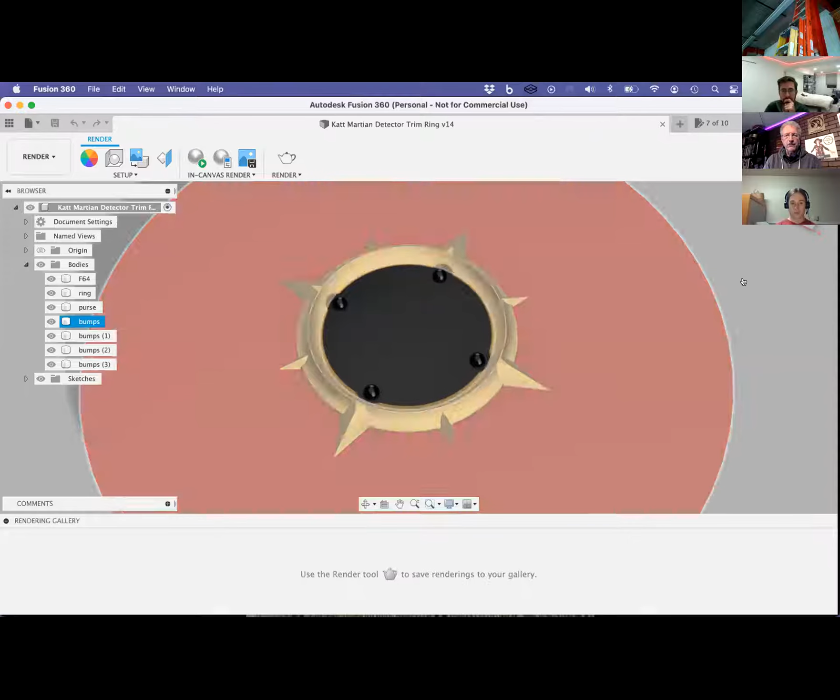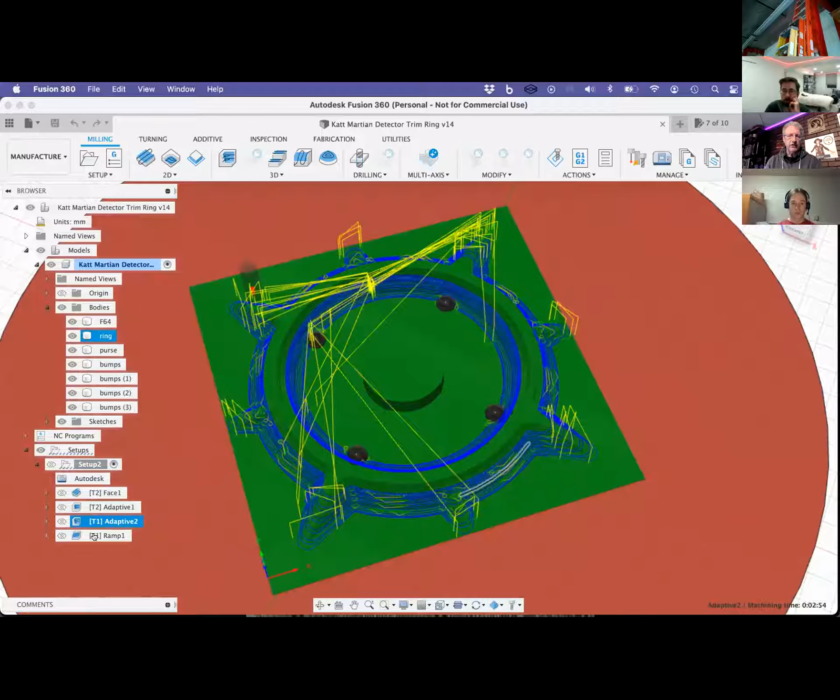Oh, and then some little cutouts here for those bolts. And then it was milled out of brass using 4 tool paths. The first one was a facing tool path to bring the material down to the highest point, then a 1/4 inch end mill to do some roughing, then an 1/8 inch end mill to get a little bit closer, and finally a 1/16 inch round end mill to do the surfacing.

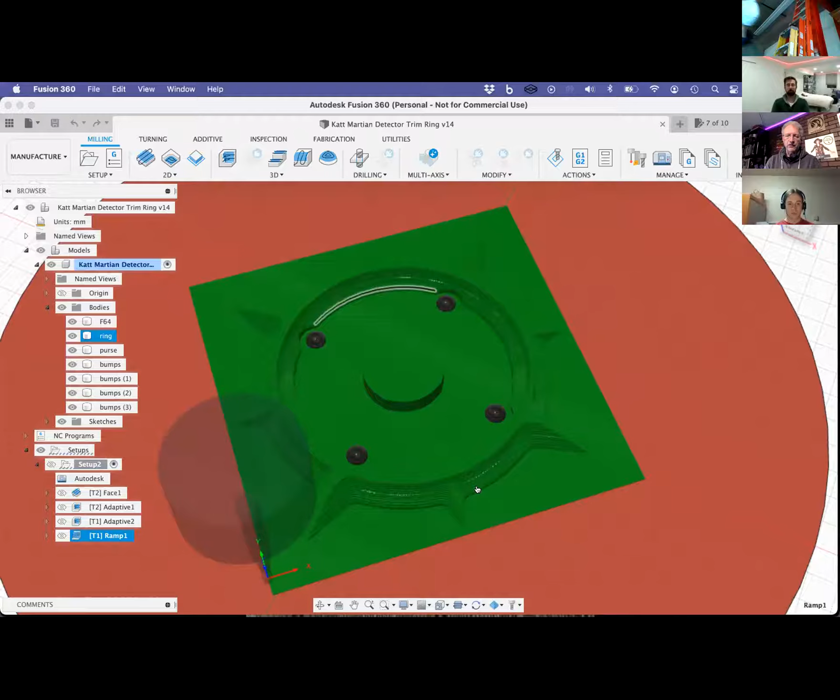It came out fairly good. I only had 1 piece of brass, so I only had 1 chance. But if I had it to do again, I think I would make these steps a little bit smaller, because there was still a tiny bit of stair stepping in the piece itself. And then there were some burrs that came off using a wire wheel on a grinder.

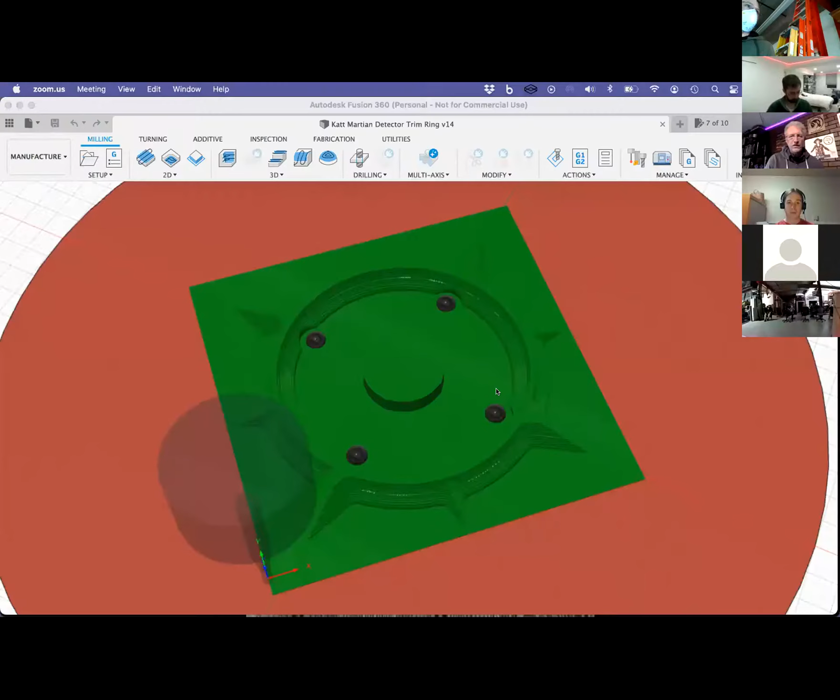So the thing I chatted, which you probably missed - if you zoom in on that toolpath you've got up now on your screen share, can you show people what that actually is? I think it looks like all it is a rendering, but it's actually not. That's tens of thousands of lines of toolpath.

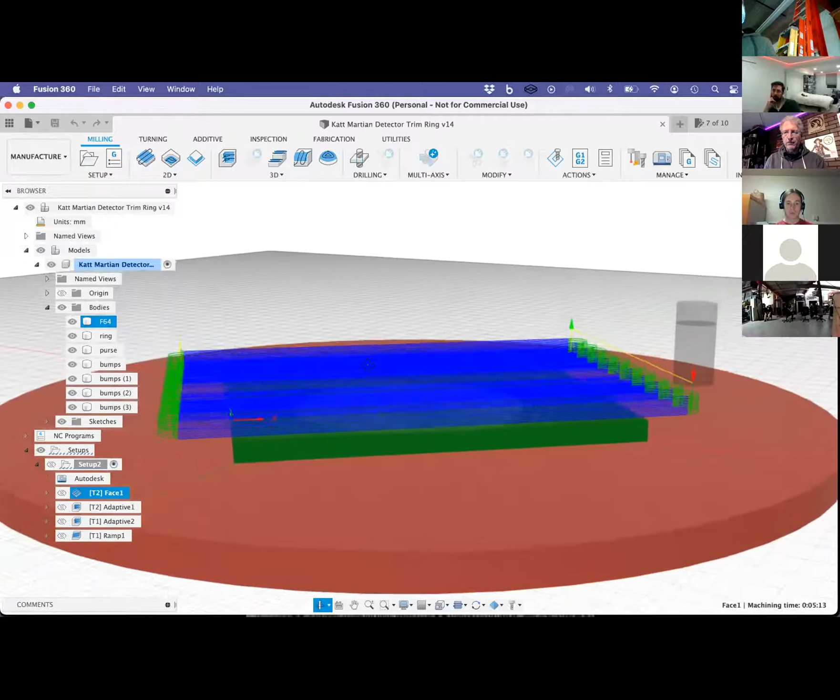Right there, so if I select the facing one, the blue lines are all cutting passes. Because this is kind of a desktop mill, I have to take small bites, so I think these are 0.3 millimeter step downs. If this was a giant Tormach, you would just go right through this and take a quarter inch or eighth of an inch of brass all at once. But on this thing, it goes back and forth, and that takes my quarter inch stock down to, looks like about an eighth of an inch.

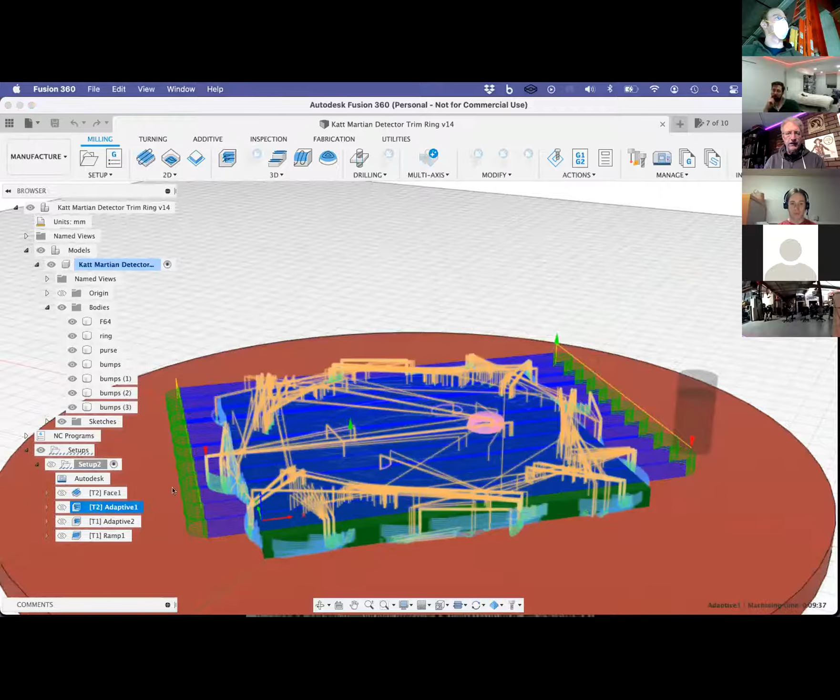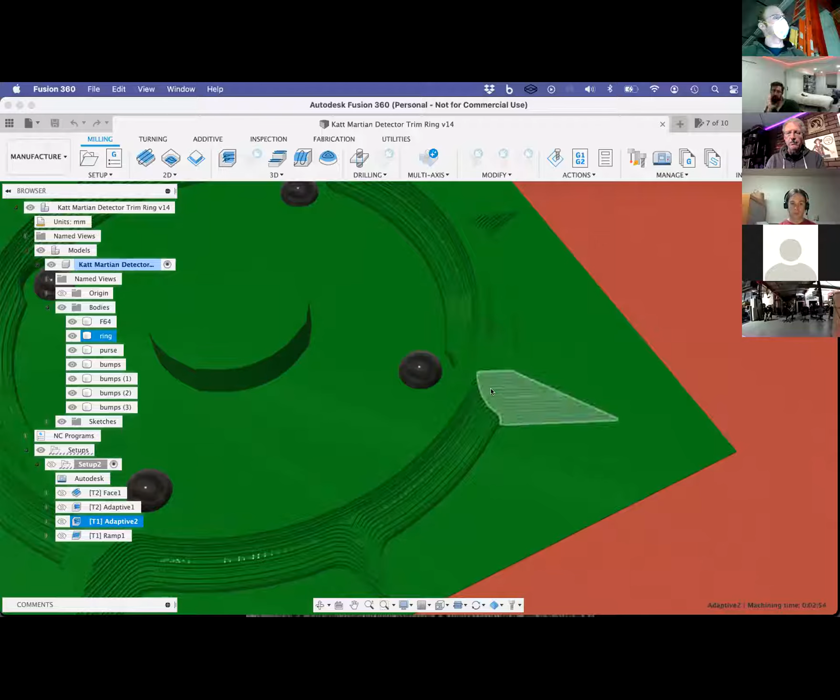And then the next toolpath is that same quarter inch end mill, but running around chopping out everything it can. If you turn off these paths, you can see the simulator showing the remaining material, and it's a little scalped because these are 0.2 millimeter step downs with a quarter inch mill. Then if you go to the eighth inch one, I think I changed the step down to maybe a little smaller, and it's a finer mill. Finally, the last pass is a spiral using a ball end mill, and it's able to round those off pretty significantly.

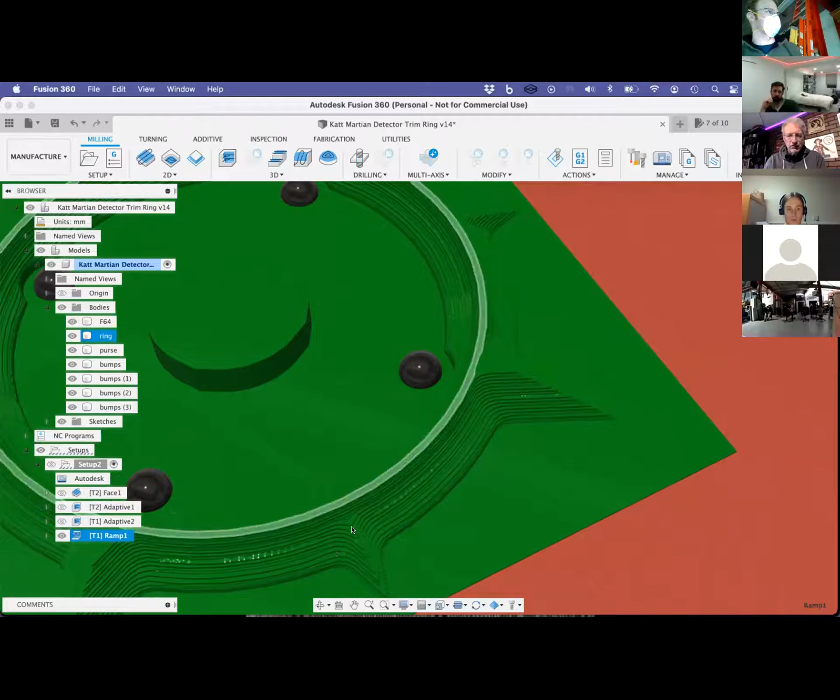Is it not showing here? Your left, the eyeball, hit the visibility. Oh, thank you, yep, maybe. I think you may have turned off the toolpath, so it might not show. Yeah, you might have to resimulate or something, but that's all right.

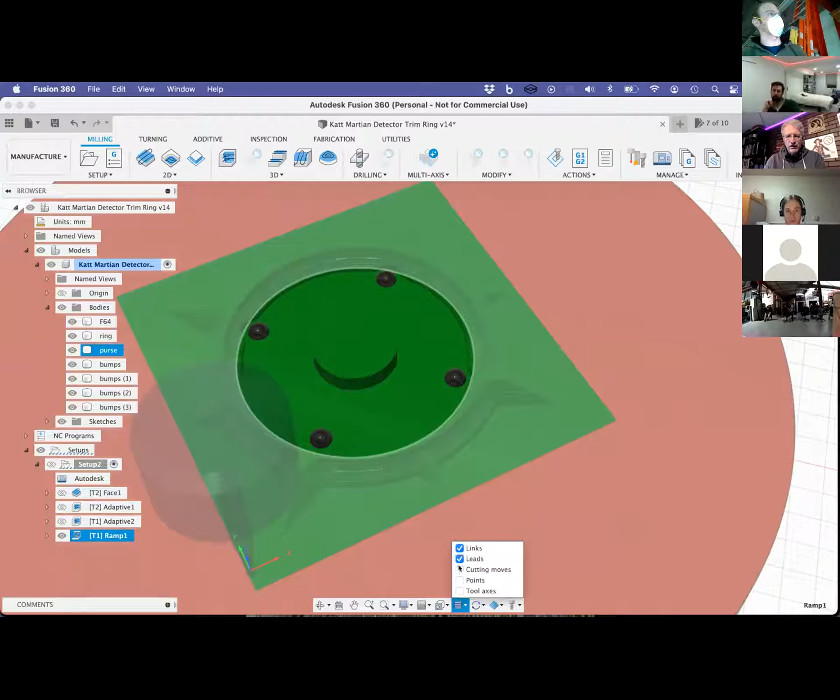Oh yeah, I probably have to regenerate the toolpaths, which takes a long time, so we won't do that. All I was getting at was when you had it up and were talking about it, it looked like just this kind of view, but it's actually like a gajillion cuts to make the cutout. But exactly, yeah. Matt's saying I think your setup 2's got to get turned on, so that eyeball up in setup 2 might have to go too. Maybe, maybe not.

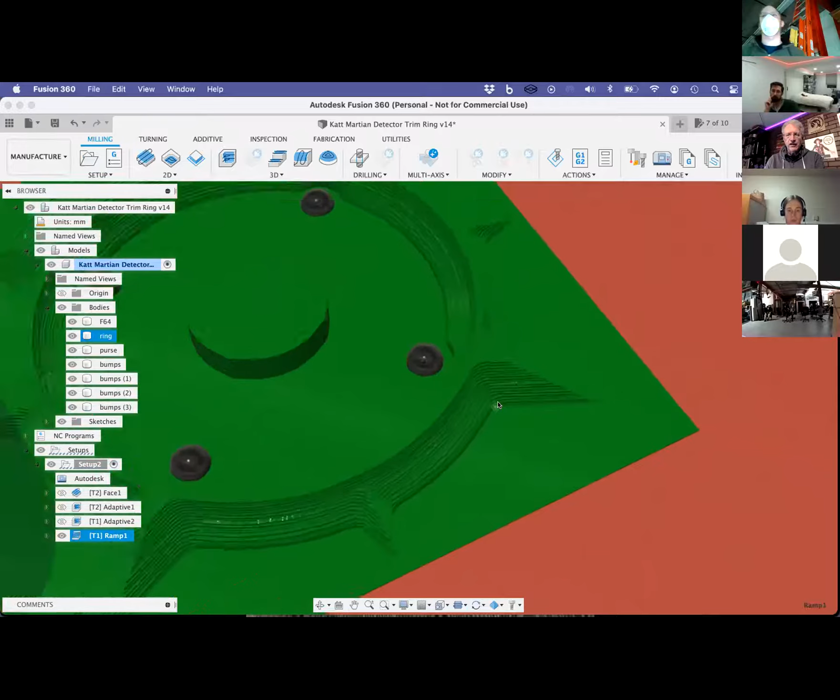Yeah, well, you get an idea. The nice thing is Fusion actually simulates this, so you have an idea of how it's doing, and that was way past actual size - actual size is about yay big. So I cut it out of MDF first to make sure it was going to mostly work, and the only piece of brass I had got cut, so it worked out fairly well.

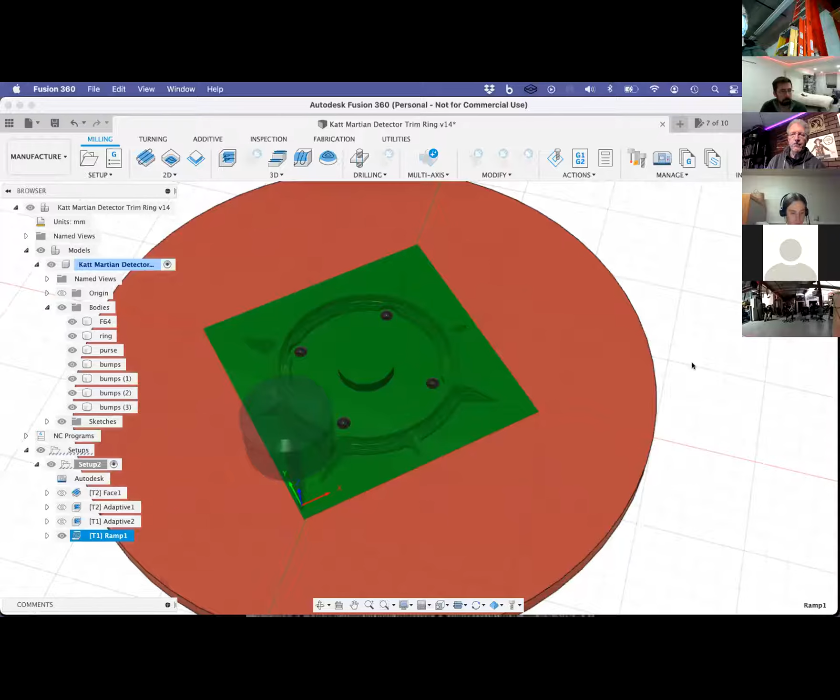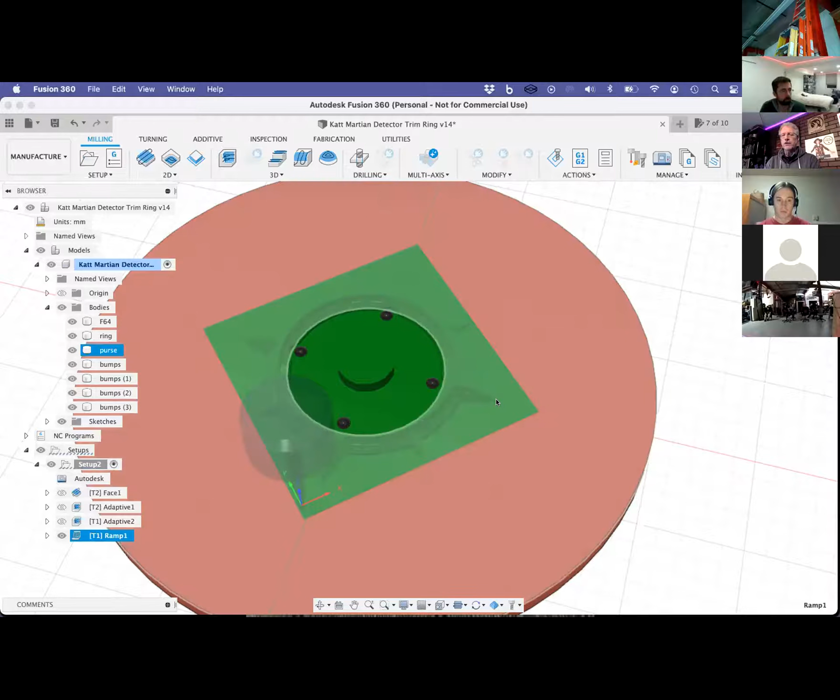Is there an intermediate step between Fusion and your machine, or is it just like plugging in a printer and it goes? Fusion exports the G code, and then I bring that into the software for the mill, and it takes it from there. That software also has a simulator showing how the machine's going to move around, so you can verify it'll all work right. It's also where you zero the tool so it knows where the workpiece is, to offset the G code to correctly align with reality. I always put the origin in this corner, and if it's metal, it can do an inductive or conductive find of the edges, or you can manually find those. So really no step between Fusion and the mill other than the mill software.

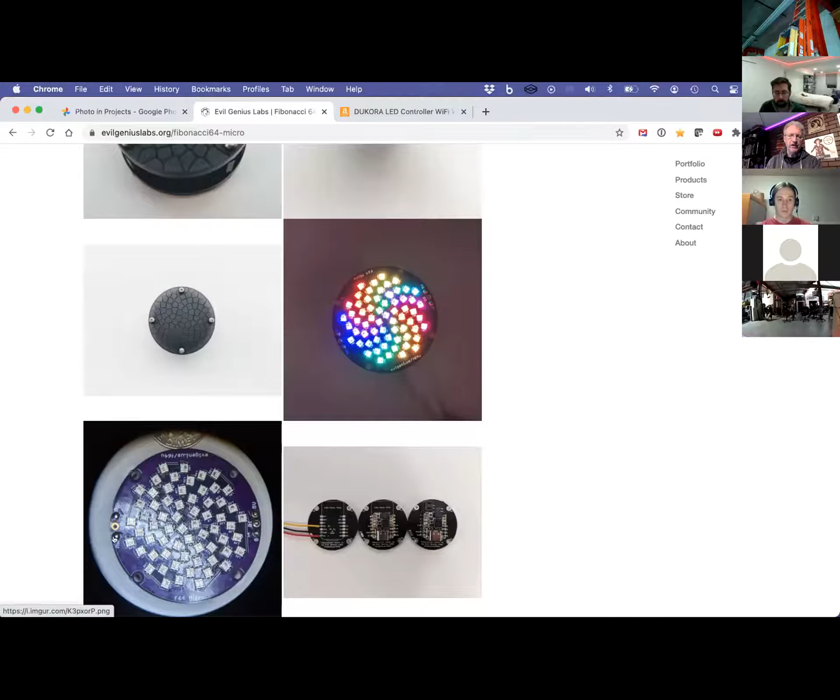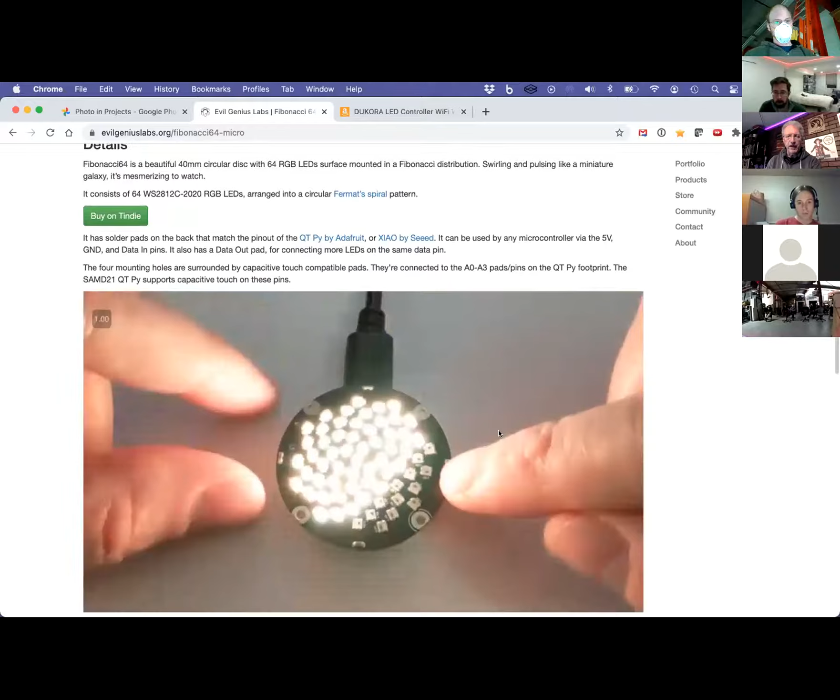And then this is Evil Genius Labs, the Fibonacci 64 micro. It's 64 LEDs arranged in a Fermat spiral, I think it's called, so it's an unwinding curve. They've got some nice software that runs on it, but we changed the colors - they would cycle through different things, but we wanted red, and we added the delay to it as well. They'll sell you just the LEDs, or they'll sell it to you with an Adafruit QT Py on the back, which I got, and then you can program that using the Arduino environment.

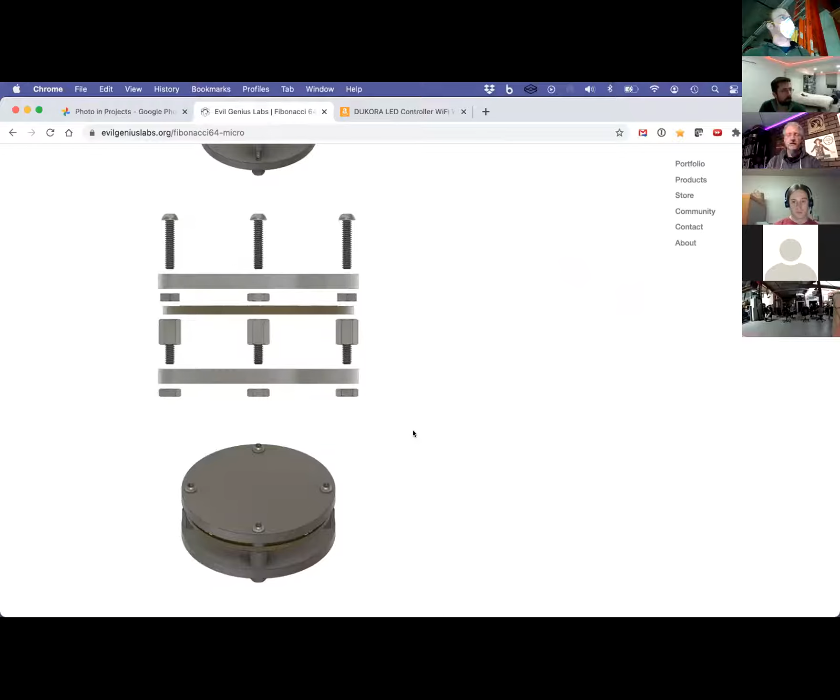So it turns out to be a nice little piece. There's actually a bigger one over on my wall that's like 7 inches in diameter, and I think 256 LEDs, just running different patterns. I think they have that up on their products page here somewhere. Is it this one?

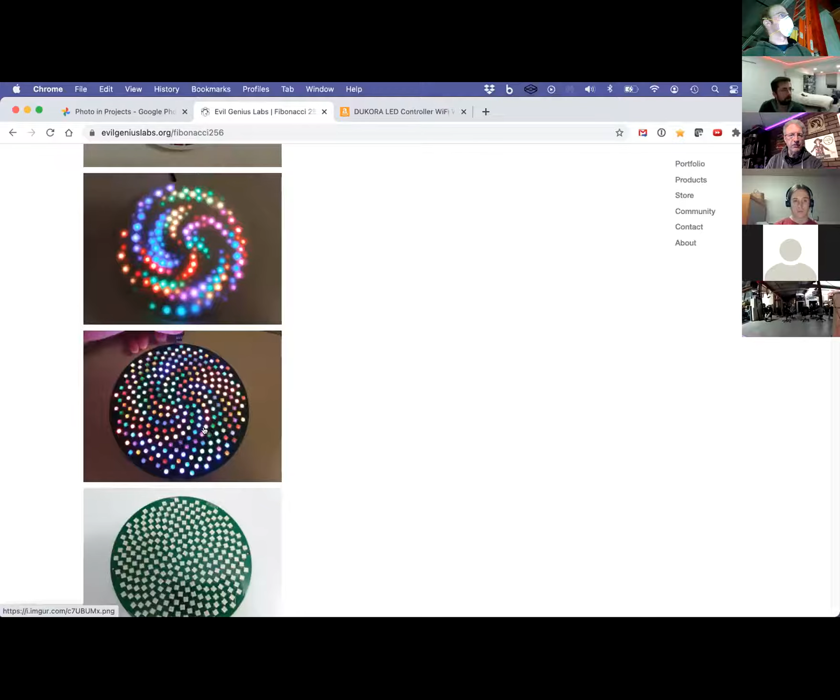Yeah, so you can tell by the fingers there how much bigger that unit is. A lot more LEDs. So that was a fun build, and hopefully we'll find some Martians.

Thanks, Chris, for letting me go first so I can have my work meeting. Yeah, I'm sure you're super pumped to hit the work meeting. I'll have you in my other ear though, so that won't be too bad. Awesome, thanks Dennis, appreciate it. Always a pleasure.

Jim, I think you're up next. So, yes, I have some, and I'll email you a couple more. I saw that, yeah, one second, I'll get a screen share on here. If you can get just the ones on the drive right now. Okay, there you go, yeah, let's scroll through those. Yeah, one second.

This is totally more primitive than the earlier presentation. So where do you want to be on your... right back there, there, this one? Okay, yeah, all right, so you gotta come up here then. Well, I'll sit down. Yeah, I know. Good. Where's the second stand? Right here.

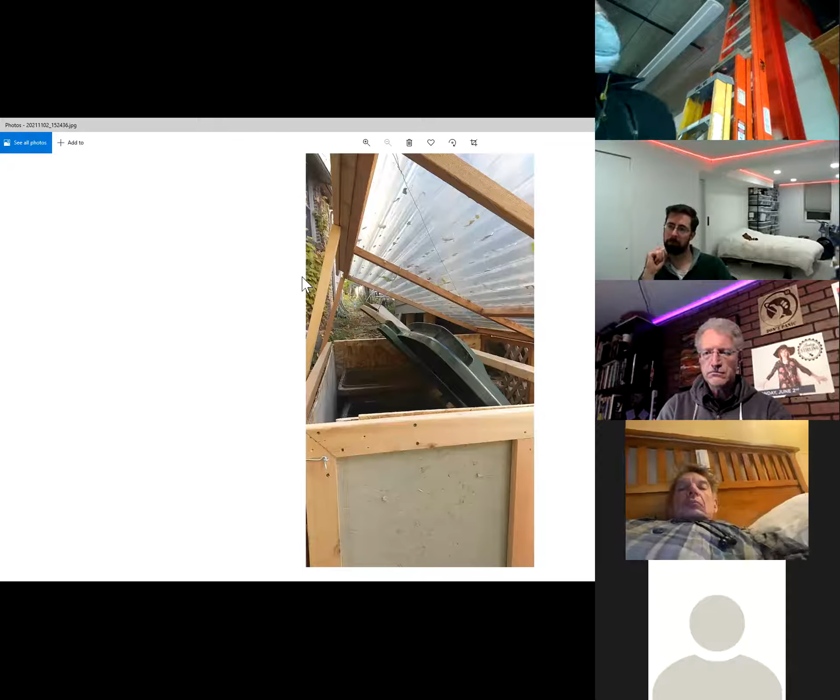Anyway, so then today I was talking with Jim Rasmussen about, and Chris—well, my problem is my users, my client, which is my wife and my son, we're like, how do we put stuff into the trash containers? So one of the lids flips up, and that is a corrugated fiberglass.

Okay, Marcus, mute. Extremely lightweight. So that's good.

Why I used corrugated fiberglass was it was a relatively inexpensive material. It was translucent and pretty impervious to water, so it forms the roof canopy for this thing.

That is shown with the roof tilted up, and actually you'll see it's in the down position there. Then the front face folds down, and then you can pull all the bins out and take them to the curb. So that was the challenge now, is to make that all easy to do.

There's the framework actually in the Garver Mill during a blood drive. So, art gallery in a Red Cross blood drive. It's a great idea.

So the door and the overall proportion of the art frame, the framework, is the golden mean rectangle. It turns out that it happens to fit perfectly 3 garbage bins and a bicycle. I think I had one more picture... somehow I might have attached the wrong picture there. So imagine that bike inside, it all fits, and it fits within about an inch of clearance between everything all the way across.

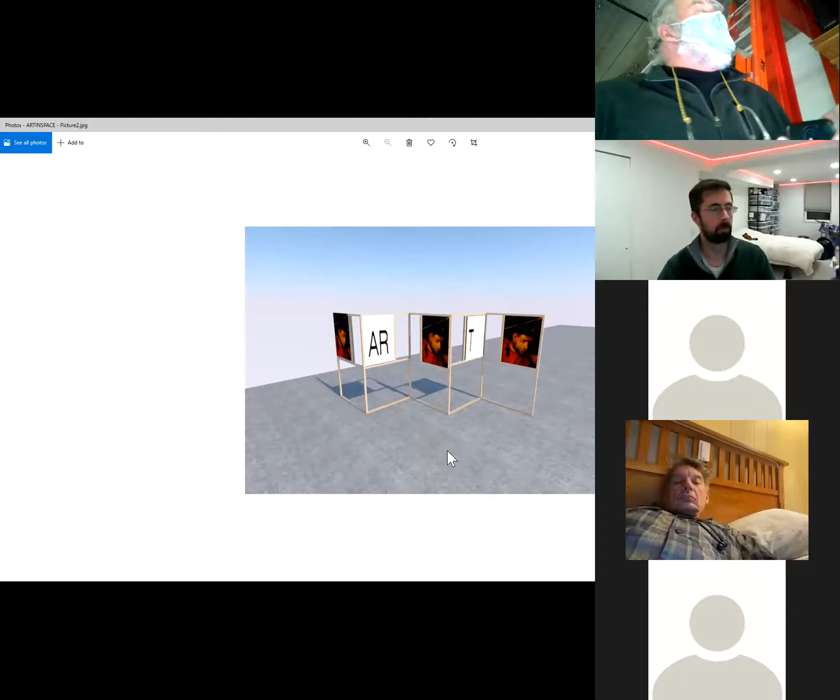I certainly can fill it all myself—I mean, you saw that artwork, it's pretty incredible. So that's kind of what will be on parts of the framework.

And then I might try to get the letters out—the art piece in place was called photo optic art concept, where you make out the message when you're far enough away to see all the words lining up. I have other images of that in place where it worked perfectly, but no one got it but me.

So gallery nights, it's citywide gallery nights next Thursday. Our stop is from 5 p.m. until 9 p.m. The old shop was next to the art studios, so we'd inadvertently get people coming by. Where we are now, we're situated right between Goodman Center and Communication up on Milwaukee Street, so there's kind of a logical pathway and we should be right on it.

So I'll be curious to see whether we get anybody or not, who knows. Anyway, if anybody has anything they want to show, demonstrate, or do, it's next Thursday, 5 to 9ish. We're gonna try to set everything up to be outside.

The frameworks will give us a surface to display on, and we could have some tables and chairs set up. Not sure about any food stuffs or.

So the deal was, Adam Gowning actually started this. He was cutting up a bunch of plywood, and Jim and I both spotted these frames sitting right in the wood shop. We thought, well, we could take Coroplast, the cheap corrugated plastic, and bond it to the plywood. Use the plywood as a structure so we wouldn't have to buy sheets of plywood, and use the Coroplast as an infill to keep it inexpensive.

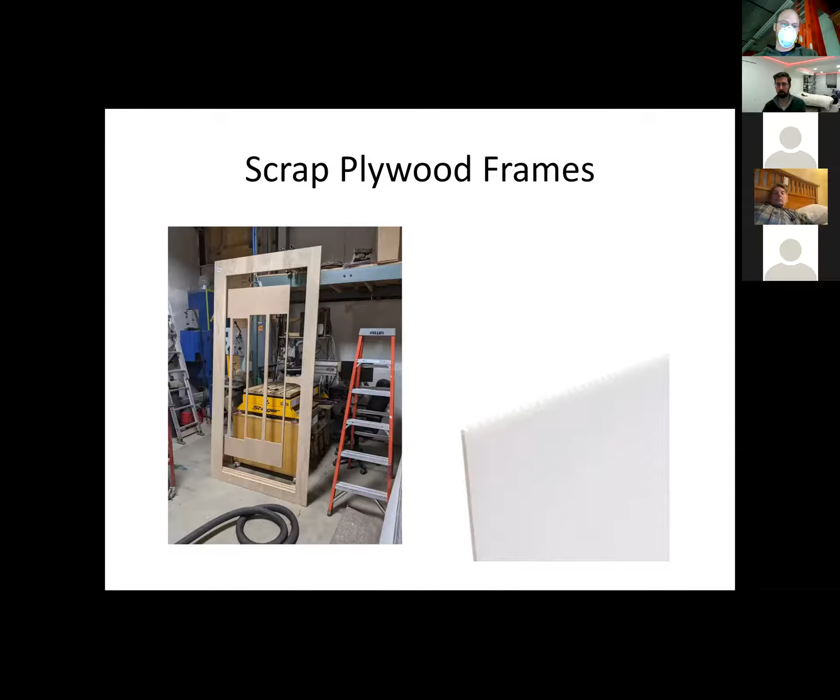The problem was we were worried about it being pretty flimsy. It's not transparent, and we got to thinking about other materials that were kind of floating around. We thought we'd go upstairs and check out the random door/patio door pile. I had bought from TJ, the scrap metal guy, a whole bunch of patio doors that were getting scrapped for normal glass - TJ normally takes a hammer and smashes out all the glass, then scraps the aluminum frames.

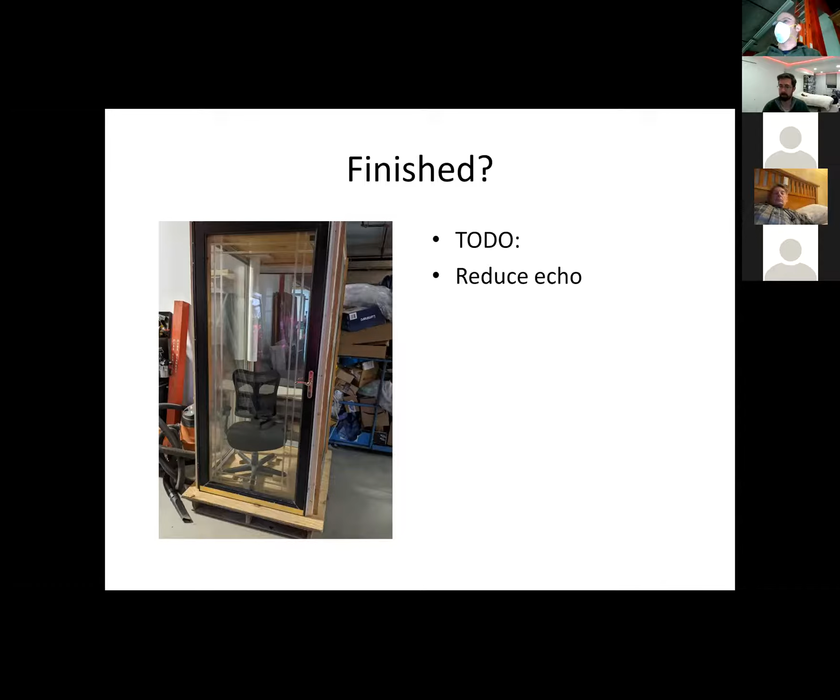Does the exhaust port hook up to outside somehow? No, this exhaust returns to the room. The exhaust is through a HEPA filter and the intake is through a HEPA filter, so the air exchange is filtered both directions, and the internal recirculation is also filtered. The idea is to knock down viral particulate - they're all HEPA, so 99.97% filtration. As long as they're working well, we should be able to knock down any viral particulate or anything else in there.

The only thing you have to do is wait a minute after you go in for the recirculation fan to clear the air, because once it does one turnover, you're more than fine. Same thing when you go out - wait a minute for it to clean the air before you open the door. Again, this is overly safe, but we want to be overly safe because that's the goal. I don't think anybody wants to get sick.

No charcoal, but HEPA particulate wise - I guess if you're really kicking it up we'd need to put charcoal on it, which would add back pressure. So you're saying it's worth the box? No relief, yeah, it's just going to recirculate.

Could be a problem for you. No mask is necessary in that space, as long as the fans are running. It turned out it's been running the whole time in here, so it's very quiet. The other requirement is that it not be...

Any other questions?